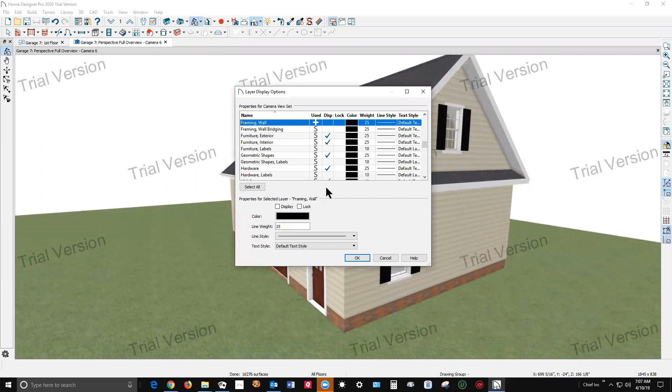Hi, I've got your plan open in my trial version of Home Designer Pro 2020. The only thing I've done in this camera view is in the display options, I turned off all the framing. The framing doesn't make much sense to show in a clean isometric view, and since you've made changes in the plan since the last time you built framing, there was framing sticking out where it didn't belong. So I turned that off.

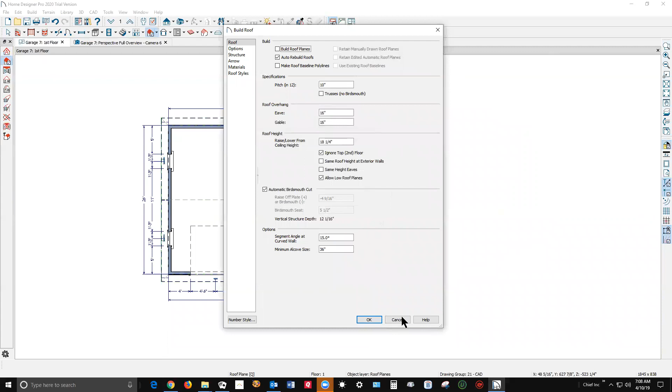Now, in terms of a frieze board, let's go to plan view and open the build roof dialog. You'll see there's no options for a frieze board. Those are in Chief Architect Premier, not Home Designer Pro. But you can still do frieze boards if you like.

I'm going to go to an elevation camera and zoom in over here. I'll go to Cabinet Tools, soffit, and voila, there's my frieze board. I'm just going to resize that so it looks more like a frieze board instead of a soffit.

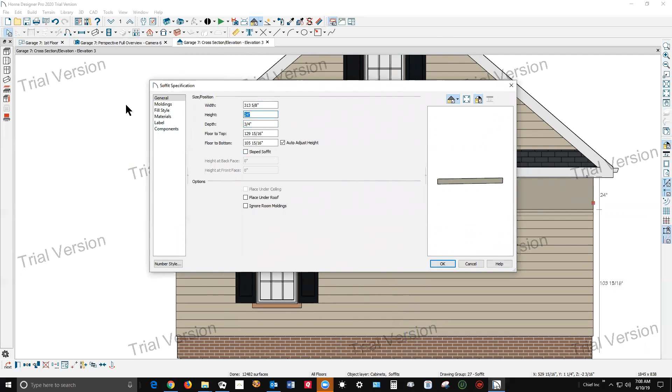Now we're going to open the dialog box and make it 3/4 of an inch thick, and the height will be 5.5 inches.

We'll put that just underneath the soffit, readjusting the height. There we go. You may disagree with that, but it's adjustable - you can do it the way you want.

I'm going to take this color here and put it on the frieze board. Well, I don't want to use that tool. I want to use the component tool instead. There we go.

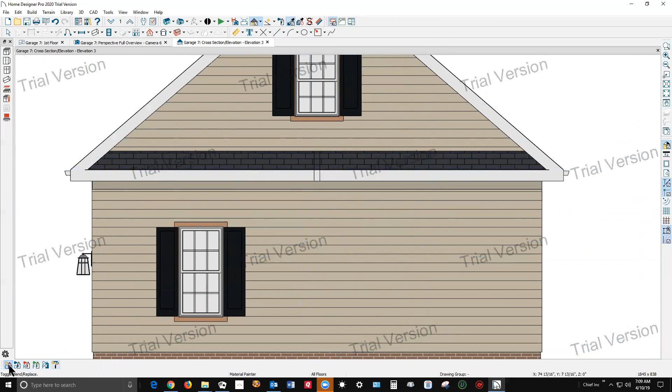Okay, now that that's in place, I can just take it and copy paste over here, and over here. Of course, it's not quite the right length on that side, but that's okay.

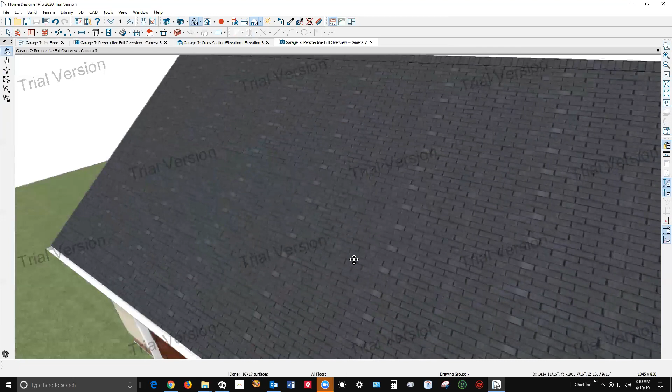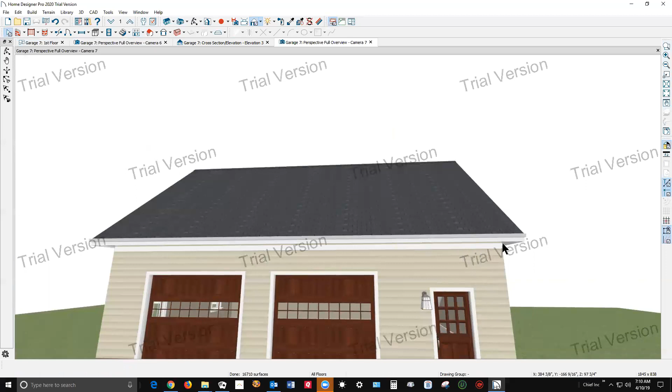And we'll go to an isometric camera. Yeah, so it's a little short on this side, but you can see this is quite easy to work with. The only person who knows it's a soffit is you and me. You just put some text on there in an elevation so it's labeled a 1x4. That's what it is - make anybody else prove that it's not a 1x4.

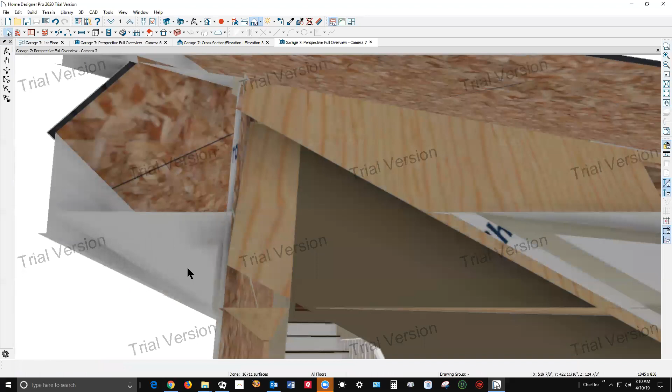You're the boss of your drawings. And we're just about done. Well... you got the idea, I hope so. Okay, then the other end.

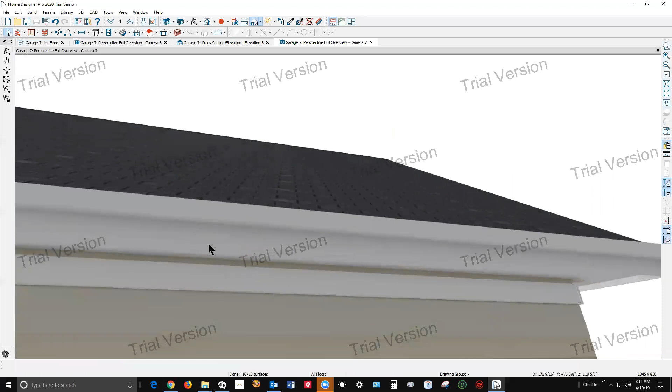And of course, this is all adjustable. See, at this angle, I can see a little bit of a gap. In elevations, the gap wouldn't show. So you have to kind of just ask, what do I want to portray here? What am I emulating? And then go with that.

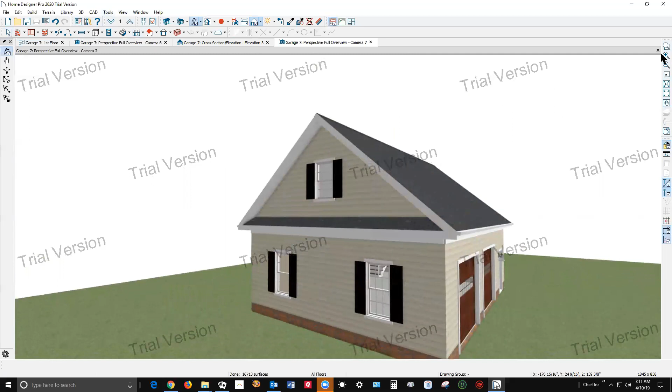So that's one thing I thought of. I didn't see any other problems with this plan. I haven't looked at the framing overview yet - let's take a look at that. There it is.

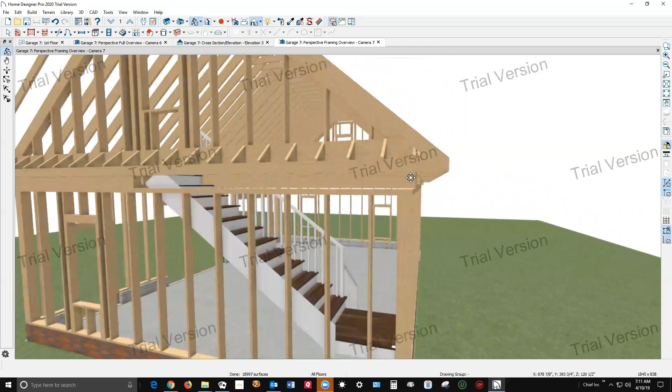Like I said, this framing needs to be updated because you moved some things around since the last time. It's okay, doesn't look perfect, but this is all manually adjustable if you need to adjust it. Not bad for a mechanical device.

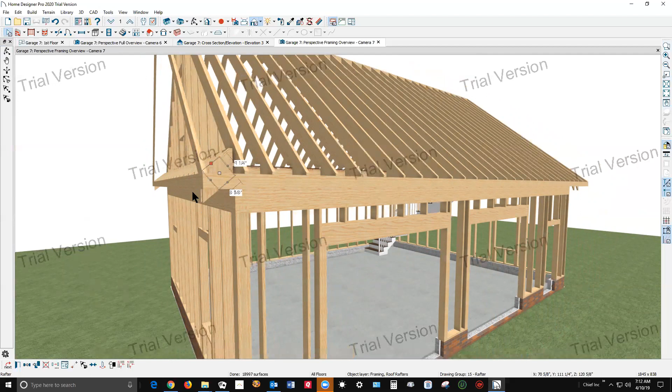These little pieces here don't make much sense - well, they kind of do, but they need to be chopped off. Your carpenter in the field would do that, but the program's not doing that. It's filling that piece in but not shaving it off so that it fits inside. That's the reason, let me show you.

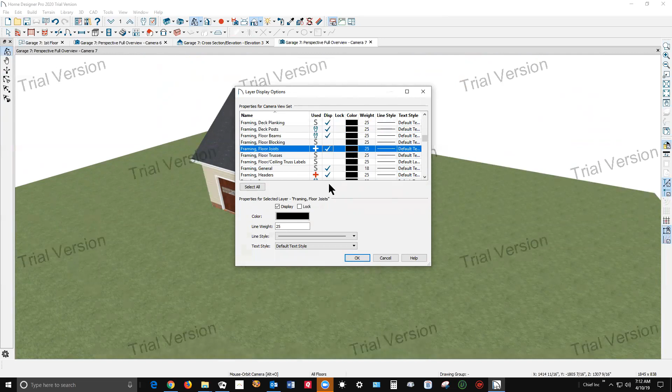Go back to this - no, not that. This is what I was seeing when I first opened it up. Go over here to framing, and yeah, you had framing wall on, framing rafters, framing rim joists, headers. There's nothing wrong with that, but I wouldn't display it in an isometric view because it just clutters the view up.

Yeah, right there, see how the framing's sticking through there? It's not being trimmed off properly. You can trim it off manually. Oh, there's my pieces I put in. Yeah.

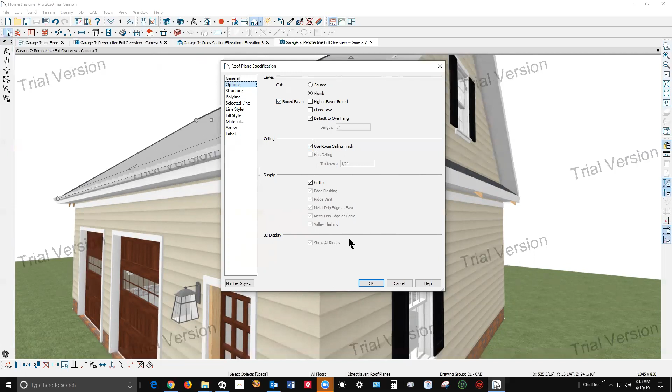Well, let's see, these roof planes need to be marked. If you're going to have that kind of situation, you need to go under options - well, they changed it since 2019. Oh, and box. Okay, you might have boxed eaves marked, but they're not boxing all that well.

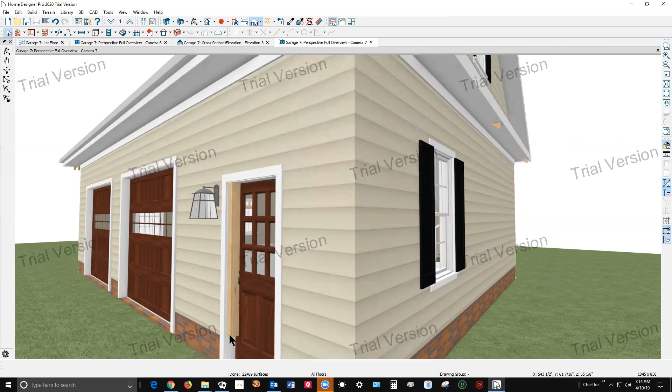Or I just need to, yeah, I'm going to grab those pieces I added and close the space. But see, with the framing turned on there, they look kind of goofy in isometric views. And see here, you moved this door, so this king stud here is now showing in the door - goofy stuff like that. So you don't turn on automatic framing until you're done moving stuff around, okay? That's my advice on that.

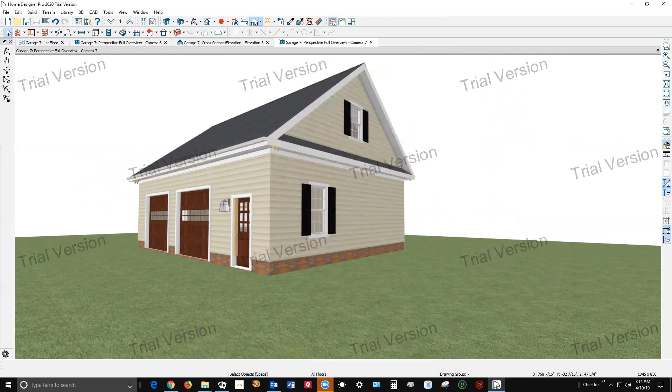I hope this helps you. Nothing devastatingly important with sound, but kind of fun to look at it. Thanks for sharing the plan. Have a good day.